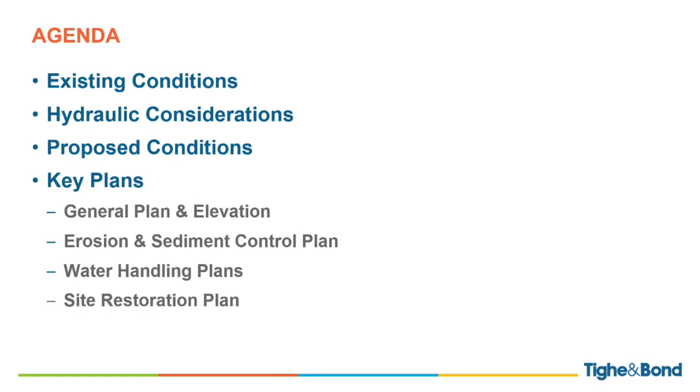All right, so in this presentation, I'll touch on existing conditions. Some of that you've already heard, hydraulic considerations, proposed conditions, and I'll go over our key plans.

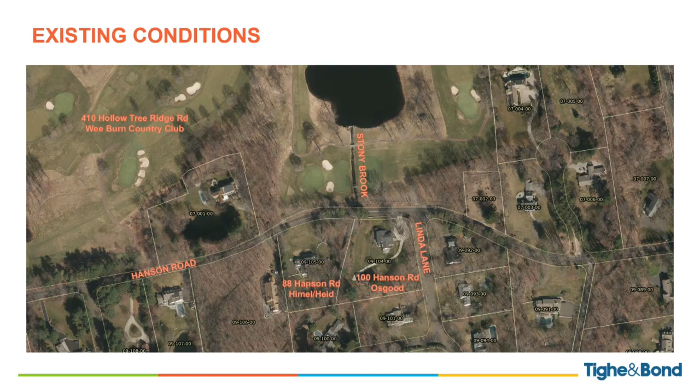Starting with existing conditions, as Rick mentioned, Hanson Road runs east-west, Stony Brook north-south. The affected property owners are 3 adjacent property owners: Wee Burn Country Club to the north, and to the south, 88 and 100 Hanson Road, which is right in the middle of the screen.

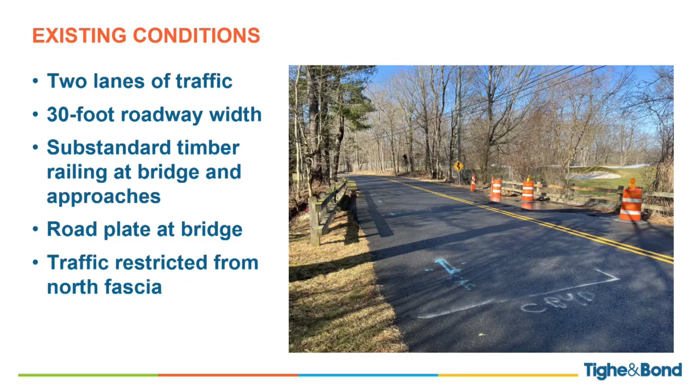Existing bridge supports 2 lanes of traffic on a 30-foot road. There are some substandard timber railings at the bridge and approaches. Rick and Darren both mentioned the road plate at the bridge. Traffic is currently restricted from the north fascia, the upstream fascia.

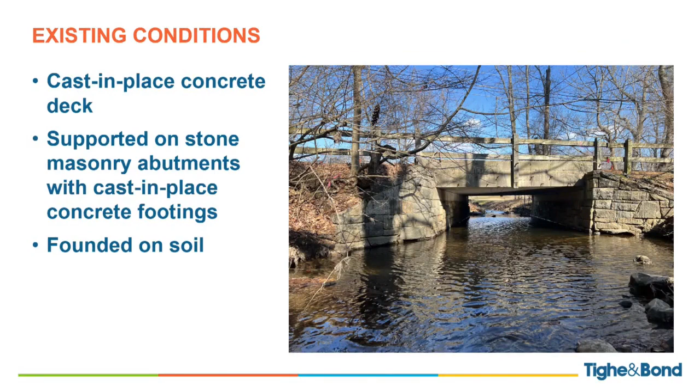Existing structure is a cast-in-place concrete deck supported on stone masonry abutments with cast-in-place concrete footings. It is founded on soil. I researched record plans when we started the project. The bridge was designed to be supported on piles. The as-built plan shows piles omitted, rest of structure constructed according to plan.

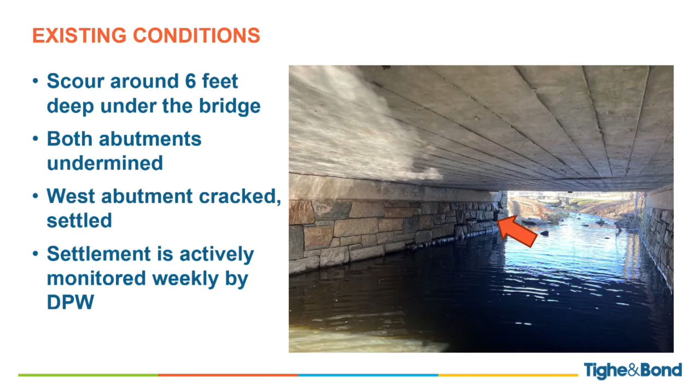Moving under the bridge, the scour is currently about 6 feet deep under the structure. Both abutments have been undermined. The west abutment, where you see the arrow in this photo, was cracked and settled. Some of the material from behind the abutment either came through that crack or filtered out beneath the footing where it was undermined.

Just exacerbating the problem. Since that happened, DPW, and Darren specifically, has been monitoring the bridge on a weekly basis, measuring the height of that crack to ensure that the settlement is not accelerating. Here's a closer look at the crack at the west abutment.

Structure evaluation, as Rick mentioned, is 2. It's in critical condition based on the abutment crack and the undermining and active scour. This is the lowest condition rating that is permissible while keeping the bridge open to traffic. It is safe with constant monitoring by DPW, which occurs on a weekly basis and after storm events.

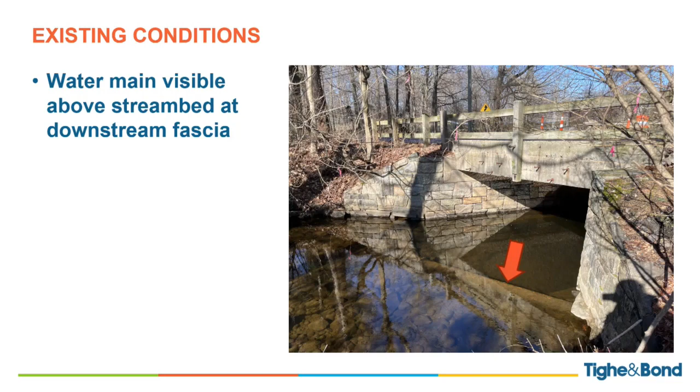Immediately downstream of the bridge, there's an Aquarion water main that is exposed above the stream bed that was constructed below the stream bed, but the stream has washed out through here. It's scoured about 2 feet through the whole area and up to 6 feet deep under the bridge where the channel is constricted the most.

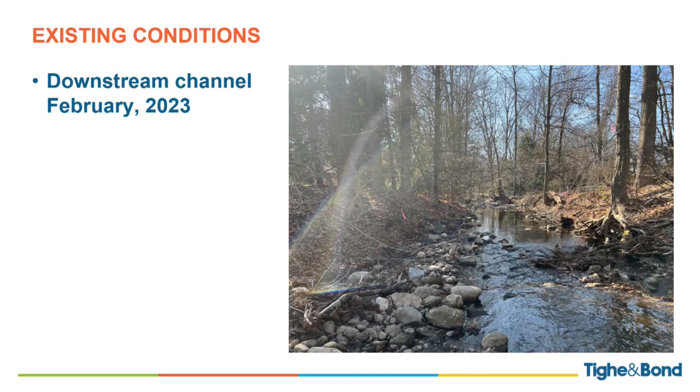Here's a view of the downstream channel. This photo was taken in February of 2023. Looks the same today. As you can see, it's a wooded area. There are some cobbles and boulders, and then some undermining along what will be the west channel bank.

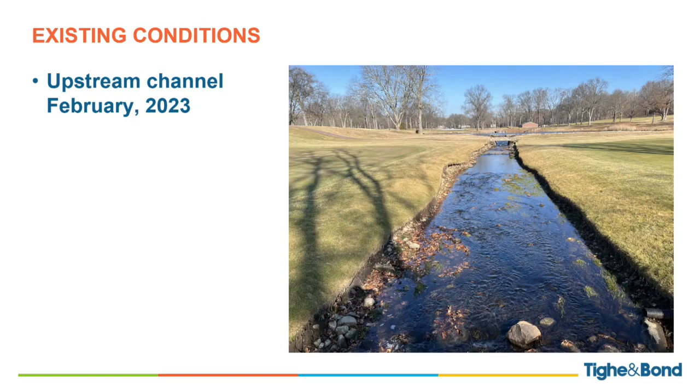Here's a look upstream. This photo was taken from the southernmost footbridge and the fairway of Wee Burn. You can see some undermining along the channel banks. It's about a foot or so of undermining all the way up to the pond.

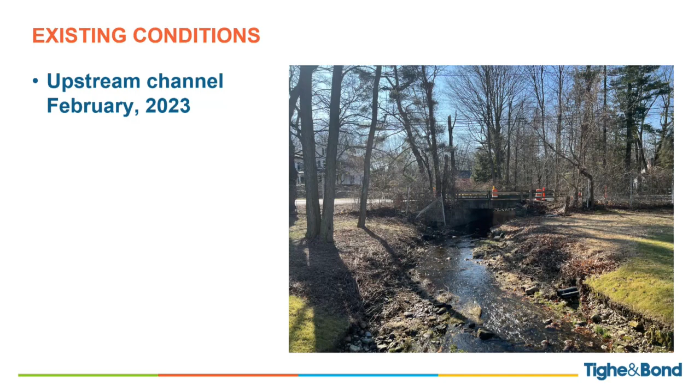And just as a frame of reference, here's a look downstream from that footbridge toward our Hanson Road Bridge. You can see in February of 2023, this area was not manicured lawn. The area around the bridge did have some either rough or natural vegetation.

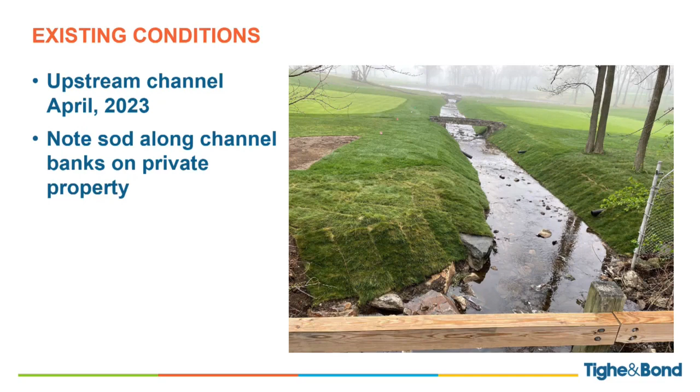This photo was taken in April 2023, and after some manicuring done by the private property owner upstream, you can see the sod along the channel banks. That undercutting has been filled in.

August 2023 photo, it shows Stony Brook at the extreme low water condition where there's barely any water running under the bridge. And you can see that the sod comes down to the water course, even at the extreme low water.

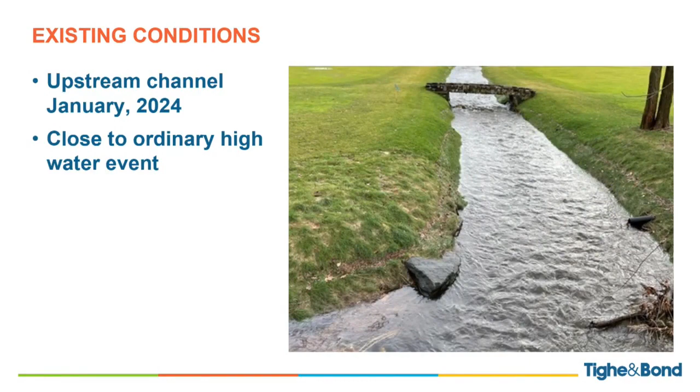And then in January 2024, this is close to an ordinary high water event where the channel is filled up quite a bit. Again, looking upstream, our wetland flagging was done prior to the maintenance by the golf course. It's just provided as a frame of reference for the plantings that are shown in our plans.

Some hydraulic considerations: as Rick mentioned, the bridge is over a FEMA floodway. The original flood study was updated by letter of map revision a few years back. When we started this project, we did our own analysis. Joe, our certified floodplain manager and principal hydraulic engineer, reviewed the area based on the updated survey.

He found that the hydraulic analysis in the LOMR, or letter of map revision, was unconservative, and that floodwaters were actually higher than what was shown in the published study.

Based on his analysis, he recommended an 18-foot span structure, necessary to achieve zero rise in water surface elevation and one foot minimum of freeboard, which are hydraulic manual and permitting requirements, while reprofiling the stream bed to eliminate the scour hole beneath the bridge.

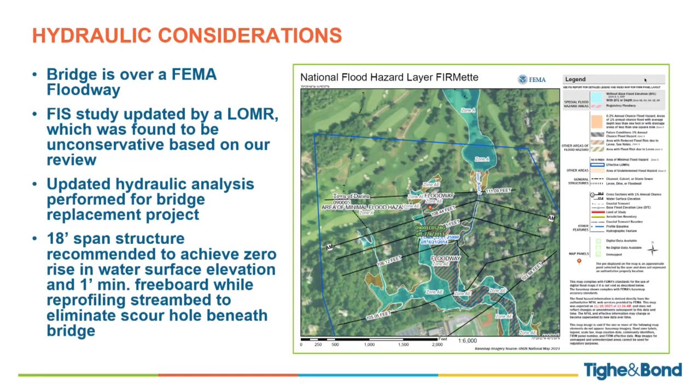So we are increasing the span length from about 14 feet to 18 feet. But we have to fill in the scour hole underneath the bridge, which is the source of our problems now. Currently, the stream bed just takes a dive under the existing structure, and that's how water is pushing through that opening.

Joe's hydraulic analysis shows that currently Hanson Road overtops in front of 88 Hanson Road. With the 18-foot opening, reprofiled stream, and regraded channel, all of that water will be contained in the structure under the road. The road will not overtop in front of 88 Hanson Road. So there is some flood mitigation benefit.

Beneath the culvert, as Darren mentioned, there will be a cutoff wall. So scour protection is provided by the floor of the culvert, which extends across the whole length of the culvert. The cutoff walls are beneath the culvert, and there will be riprap in front of the cutoff walls at inlet and outlet. But that riprap will be depressed below natural stream bed material, so there will be 18 inches of natural stream bed material atop the riprap, providing a natural channel for fish.

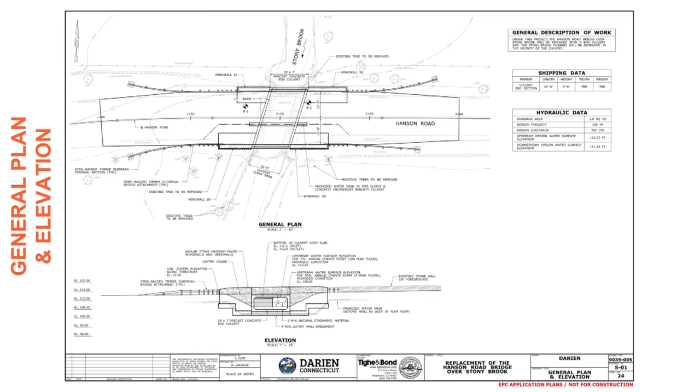And here you can see the rerouted water main. The water main will be rerouted beneath the culvert in the roadway rather than in the downstream channel. It will be protected by a casing pipe, and that casing pipe will also be in an additional concrete encasement that runs beneath the culvert.

For our erosion and sediment control plan, we have a sedimentation control system around the entire project. We have anti-tracking pads at both approaches so that construction vehicles coming in and out of the site are not making a mess of the road.

Our construction will be done utilizing a bypass. We originally showed one large bypass pipe, but that bypass pipe had a high velocity at the outfall, so we used two smaller bypass pipes to provide more friction on the sides of the pipes for the area of water running through them. That slowed the water down, and the velocity out the outfall of the bypass pipes is less than the current 50 and 100-year design storms.

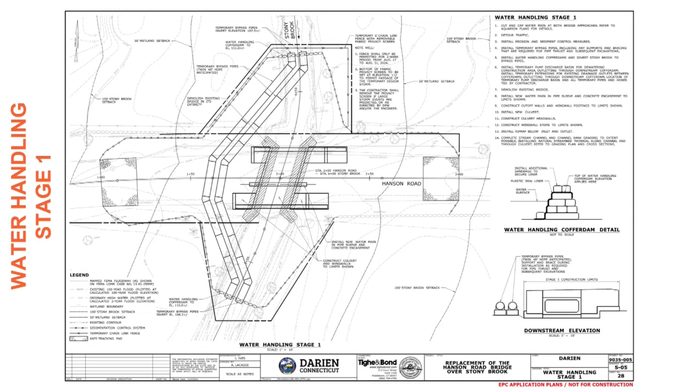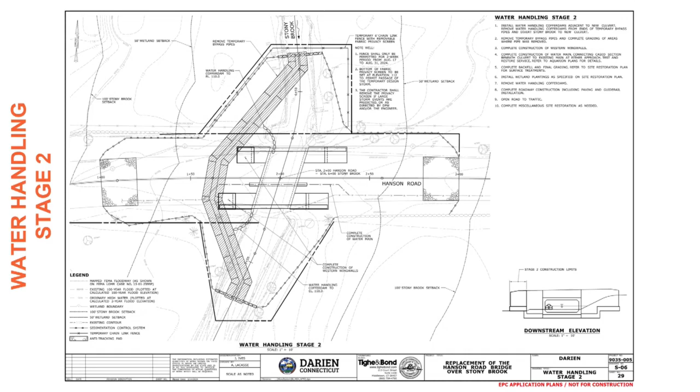So there'll be a cofferdam at the upstream and downstream ends of the bypass pipe, and all of the work to remove the existing structure and build the proposed structure will be done in the dry. Once the bypass pipes are in and the culvert is constructed and most of the wing walls are constructed, we'll remove the bypass pipes, reroute flow through the channel, and finish construction of the upper portions of the retaining wall.

Our site restoration plan includes natural stream bed material in the channel. So everything below the 2-year flood elevation will be natural stream bed material. There's a spec for that material developed by CONDOT and Connecticut DEEP that is used on all stream crossing projects. That is the spec we're using for the stream bed material. It should be erosion resistant and friendly to fish and other wildlife.

The stream banks in the vicinity of the bridge will be planted with wetland grasses. This is called conservation seeding for slopes, another CONDOT and Connecticut DEEP approved spec for wetland grasses. We also have shrub plantings along the channel banks.

We have some replacement trees. We are removing 6 large trees, 4 of them alive, 2 dead. We are showing 5 red maples and numerous shrubs, red-osier dogwood, and red chokeberry.

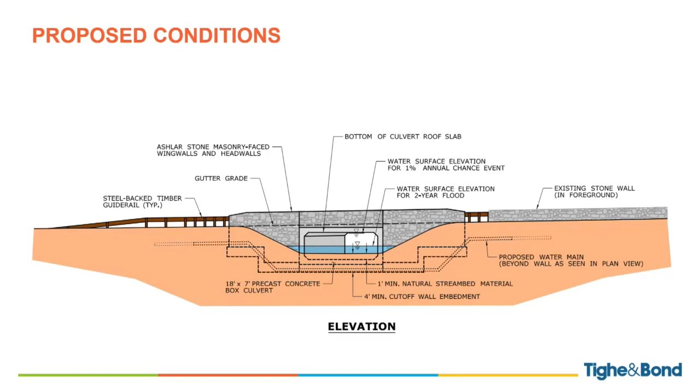Is that portion wetlands? There are wetlands, a narrow fringe of wetlands all along Stony Brook. There's nothing really—they're barely outside the limits of the water course. Got it, I understand, and it's got the 50, the upland review.

I understand, it's in the— Right, and the Stony Brook upland review is 100 feet. And those areas are marked.

The fence is a safety issue that's dictated by the state, as I view it. So it's a health and safety issue dictated by the state. It's got to be, they have to deal with it.

Now, the shrubbery, trees, et cetera, that Mr. Himmel would like and will have his landscaper work on, that's between the town and him. I'm not sure how much that has to do with EPC. I don't want to diminish the value of it, however, if there was an additional planting put in, it doesn't affect the outcome of what decision you're going to make.

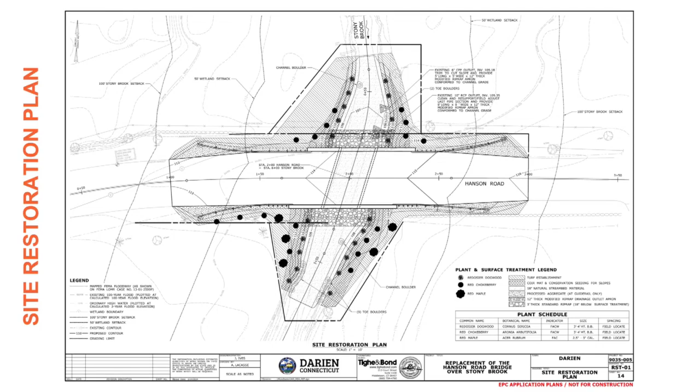All right then, I think you're okay with two weeks, Darren? I am. We have a lot of easement issues to work through with the three property owners. From a technical perspective, I think they've addressed a lot of the concerns. That was a great presentation. We'll leave it up two weeks.

Okay, we'll give Walter two weeks, but in two weeks, this is a safety issue, so I don't want EPC to be seen as stopping this. The other thing I would say is, because I drive over Hanson, I drive over that bridge, after seeing those photos, I'm going to think twice. I worry about, if garbage trucks, heavy vehicles going over that, man. But I'm glad it's being inspected, thank you, Ed Gentile.

Jerry, you're not going to be granting two weeks. You're going to go to April 3rd, and you're going to conclude the hearing perhaps at April 3rd, and you're going to vote in May.

I mean, I feel in this case they spent a lot of time addressing the real meaty technical issues. A lot of these things, I get it, that they want time to review plantings, landscape schemes. Temporary storage, et cetera, that's a real issue, and that affects the neighbor. I can appreciate that. If I have to call a special meeting in April, we'll do it in April. But, just to push this along.